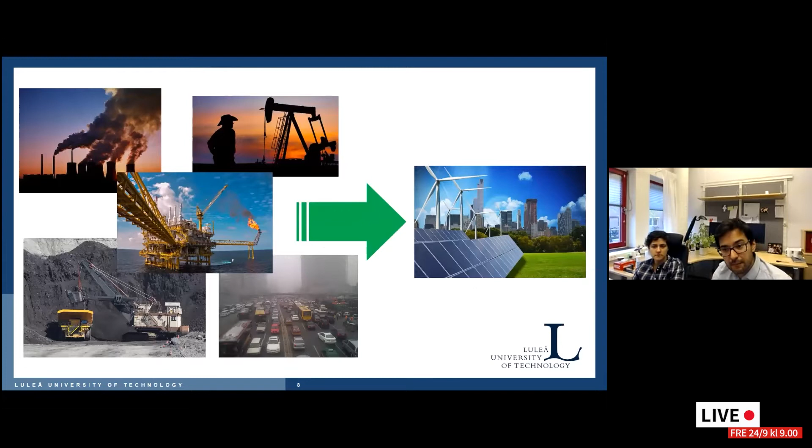So mainly what we see in our group is how to do this transition towards clean energy, but we do that in a big group, including fundamentals of how to produce biofuels, how to store them, how to use biomaterials, for example, to increase efficiency in some kind of process.

But we also need to see the other end, how to communicate this to a national level, to create policies. So we need to use biofuels, but we also need support from government to make this process achieve other levels. And this is what we do here.

And we can go from the fundamental part, as I said. So mainly this part is what we both here are doing. We're looking specific - for myself, I'm doing research involving gasification, that is how to produce a syngas, or synthetic gas. But this is really focusing on fundamental parts.

We have another group here using, for example, energy systems and policies. Another group studying energy efficiency, and another group studying more batteries and CO2 capture and storage area. And the interesting thing about all these groups is that we all are in somehow close contact with the big industries in the field we're working in.

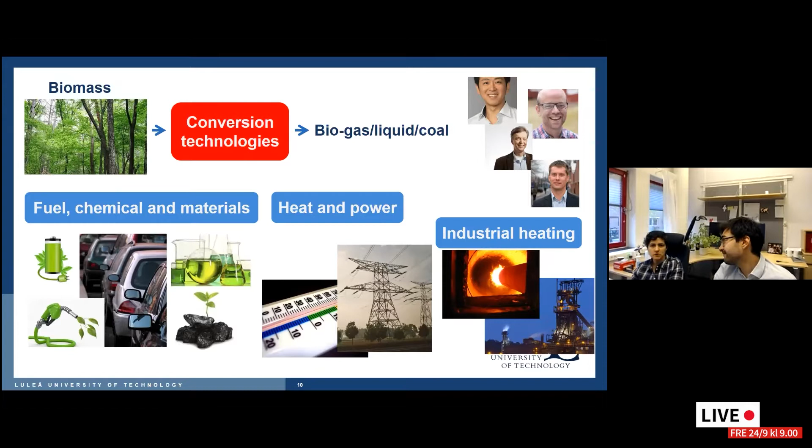Another group we have is energy systems. In the same way that we study how to produce biofuels and introduce them into industries or our lives, we also study how to increase the efficiency of current processes, to save fuel consumption. We also study energy efficiency in buildings, not only in industries.

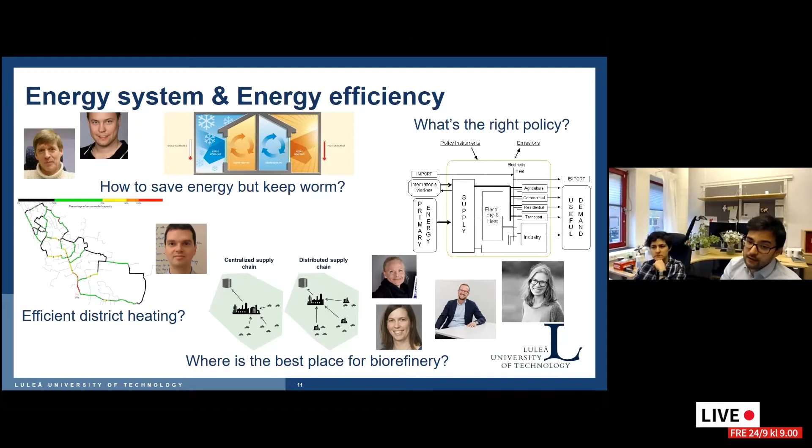Another group studies system analysis, at a national or municipal level. If we introduce, for example, a new biorefinery to produce biofuel for airplanes, what is the best location for that plant, and how do we model what it will affect in other industries or other actors in the energy area? That's what this group does.

Also, in renewable energy, the heart of any system—whether energy comes from solar, wind, or anything else—is the battery and storage, because we need to store energy and use it later or integrate it into the system.

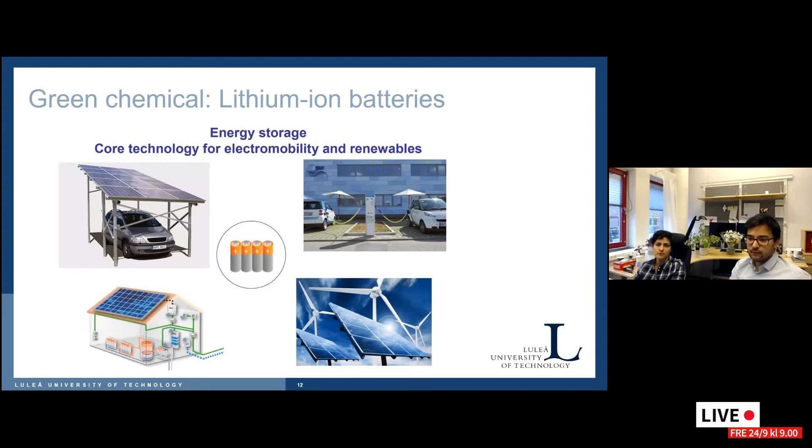For storing now, the most popular option is lithium-ion batteries, which you might know from laptops or mobile phones. But what's really used now are stacks—larger units of lithium-ion batteries.

Now it's really at the edge of science for lithium-ion batteries, because their lifetime and efficiency are really important these days. You can see how chemical engineering and chemistry relate to our division of energy engineering, because the fundamental of the lithium-ion battery is the chemistry happening, and then the electricity you get from that chemical reaction.

We also have a group working specifically on green electrolyte, green anode, and green cathode, so that all the components of the lithium-ion battery are also obtained via green energy.

Now we're going to do a small virtual visit in our lab. Hopefully you can see the video.

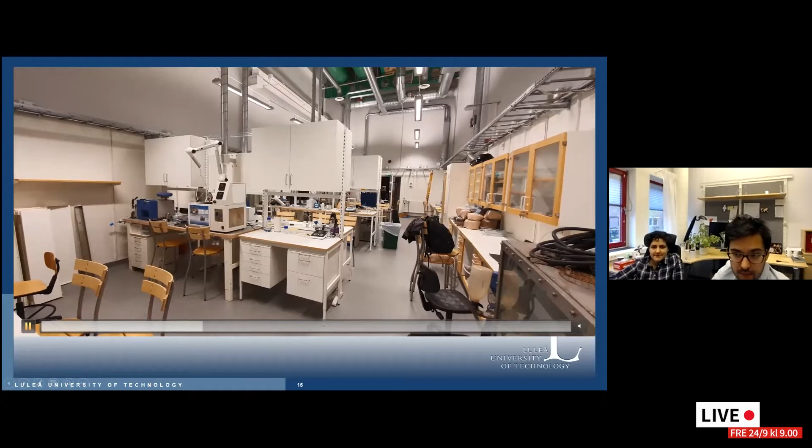This is the first video—this is where we do the chemistry of our research. Here we do fuel characterization, for example. We do some studies in carbon, CO2 capture, ionic liquids, and batteries, as Zahra was saying. Characterization.

This is what we call the clean lab. Now we're going to see... let me try to change.

This one is the big lab, so it's a bit more—I won't say dirty—it's a bit more stuff with big reactors.

Here we have the main four reactors we can see: one is an Auger Reactor for biomass pyrolysis, a drop tube furnace, then a pellet boiler—more like a commercial residential pellet boiler, where we study clean gas and cleaning of flue gases—and then this is a flame reactor, where we can visualize what happens inside a combustion chamber or in a gasification process.

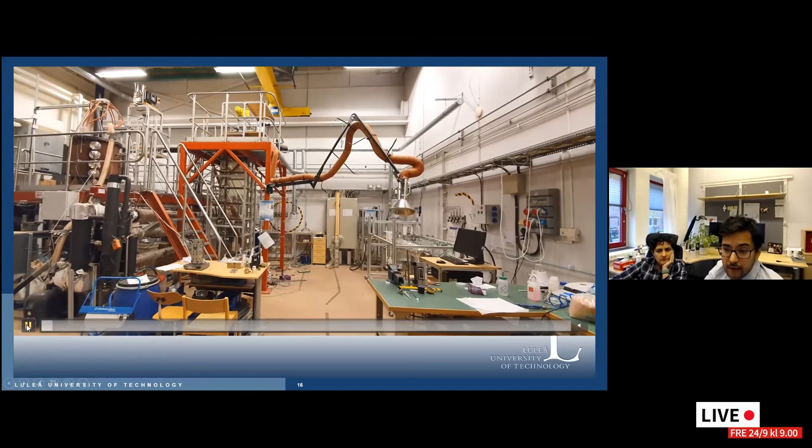If we enter the lab, it's going to look a bit messy, but I don't think we can clean more than this. No, it's very dedicated.

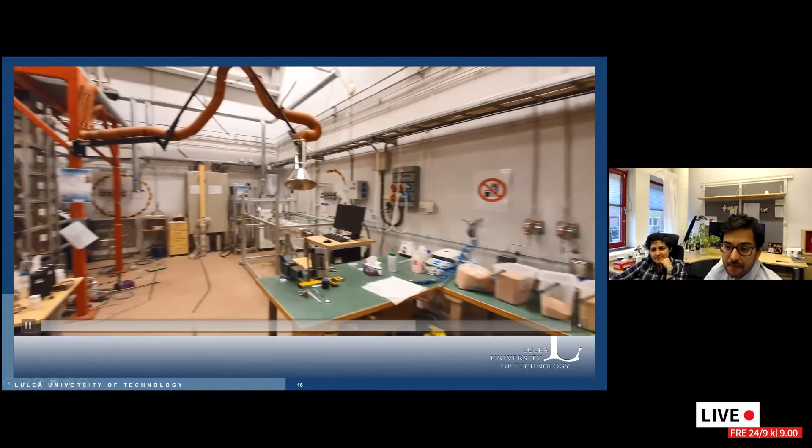So here we have all of our biomass. We can prepare them, characterize them. Then we can go to the first reactor—it's this reactor, for example.

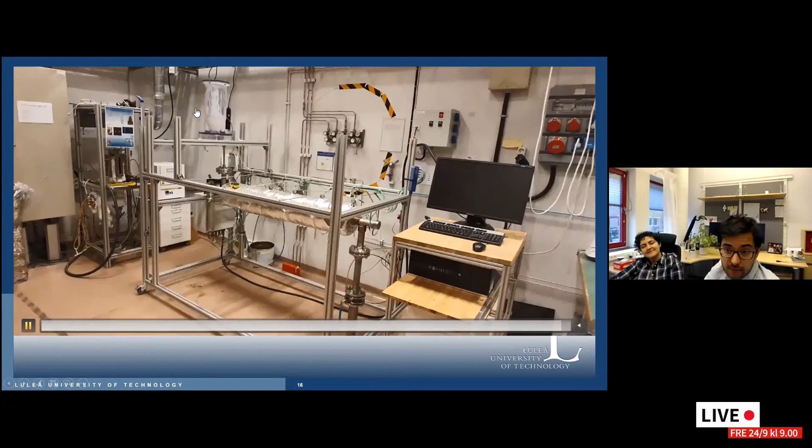We call it the Auger Reactor. Basically we can feed biomass from this hopper here, and this is a screw feeder where we can preheat it, and then we can produce charcoal in different ways using different processes.

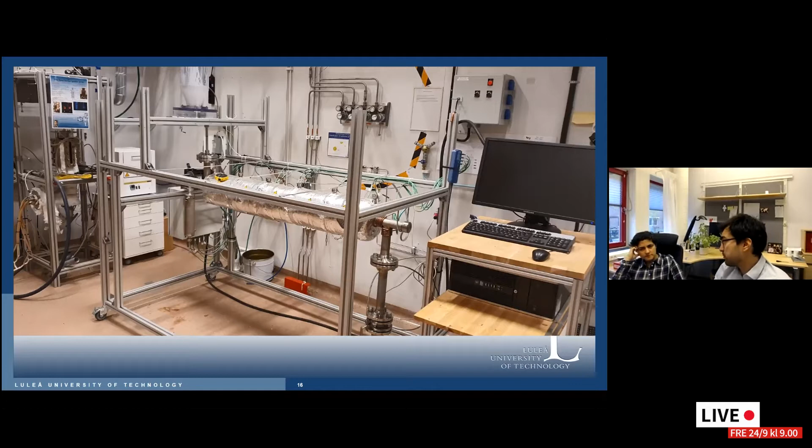So here we basically investigate how to produce charcoal using biomass. This relates to the charcoal you use in your barbecue or for cooking, but we can also do this for substitution in industries—for example, they use a lot of coal for producing iron or for heating industries. We studied a lot how to use, instead of coal—a fossil fuel—charcoal or biochar. We need to produce this biochar with specific characteristics depending on the purpose. I think this is also what Zahra is doing in her research.

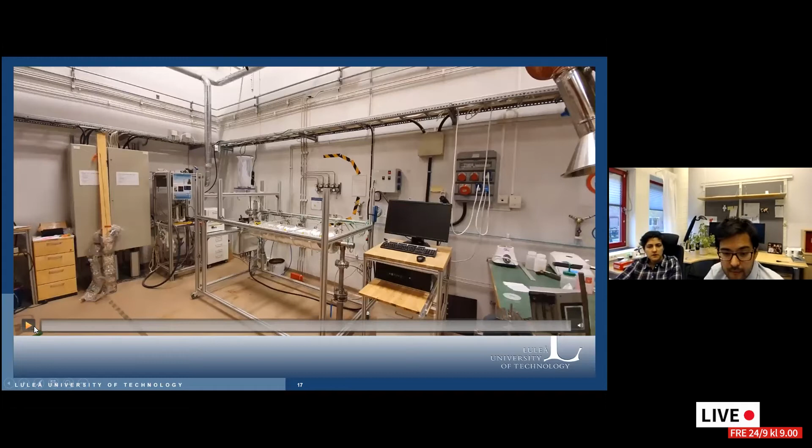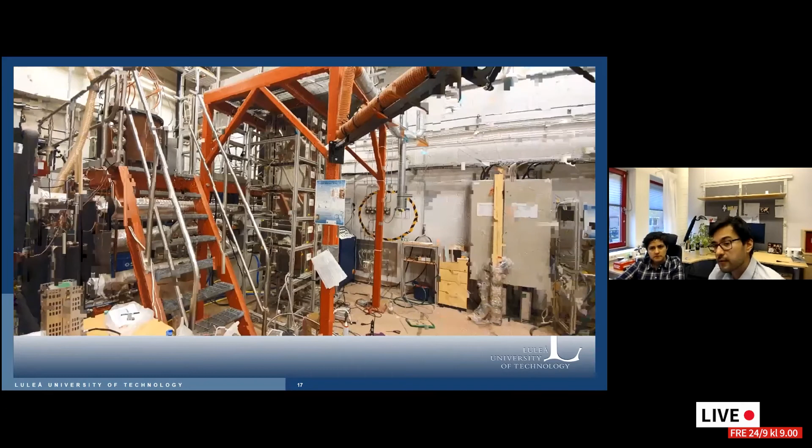Let's try to go to the other part of the lab. This is the drop tube furnace, so we can study how to produce different biochar or even syngas. Now the video is a bit... maybe we can stop the audio, yeah, I will just stop here.

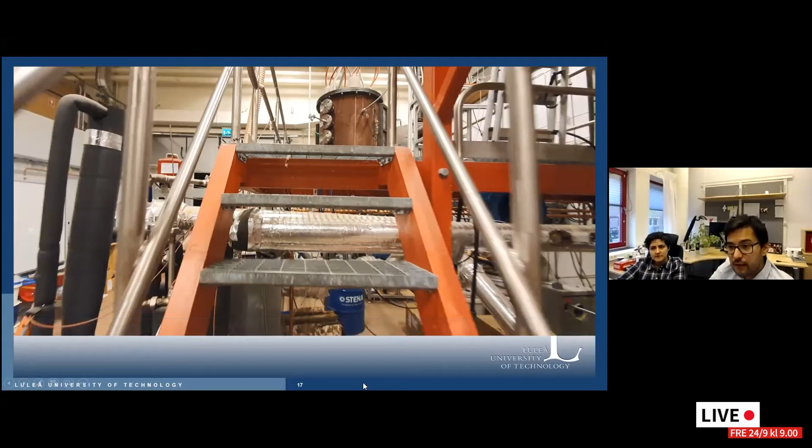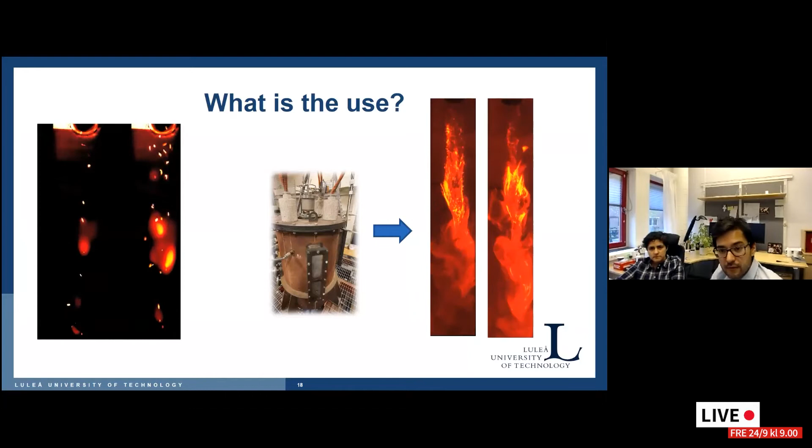What we saw there is this big reactor, we call the Flame Reactor. We inject biomass from the top, for example, and then we can see what happens inside. You have some nice cameras positioned, so we can see the flame, the combustion, or the reacting conditions inside this reactor. This is what I do, trying to produce syngas in a more efficient way. We can also see this with small particles in other conditions, using cameras and optical access reactors.

During these studies, as far as we have experience here, we have a really good atmosphere. It's really friendly, and the PhD students and seniors are really accessible and helpful. Somehow you are really free in choosing your field of interest. Since the future is for energy, you're welcome to join our group. We are here in the corridor if you have any questions or want to talk about any specific topic for your future studies. Welcome to join us.

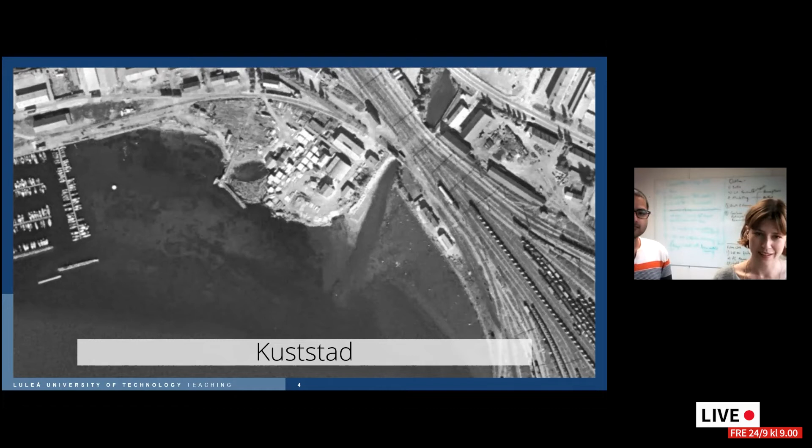This is Kuststad, close to the South Harbor, close to Willys. And this is how it used to look like. And you think, what is this? Well, if you think about it, there are these new beautiful apartment buildings that they built there. And they completely filled this area of sea with soil so they can build these apartment buildings on top of it. So it's a little bit like what they do in Holland and Amsterdam, where they're trying to reclaim land by putting soil there.

So now we would like to show you a little demonstration of what we mean when we talk about how we build with soil and want to improve the soil to take these huge loads of buildings and other structures. So we have to stop sharing our screen momentarily so we can show you two little experiments.

So firstly, I have this bowl here with a suspicious white liquid. This is cornstarch filled with water, and it has very interesting properties because it behaves like a fluid, like you can see it drips. So it doesn't have very good bearing capacity. You can't really build a building on top of that.

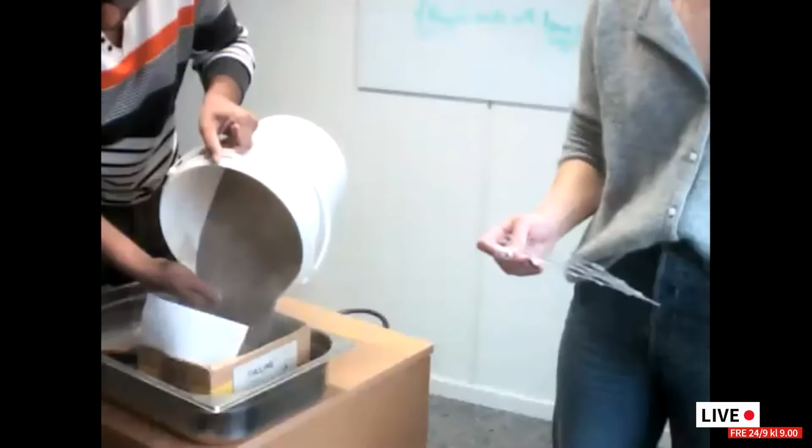Now I will put the final layer on that. So Tarun here is using paper, but in real life we obviously wouldn't use paper. We have things called geogrids that look something like this. They are kind of plastic mesh materials that are quite hard, quite rigid, and these can be used to reinforce soil.

So now you see this box is filled, and now I'm going to open it up from one side. And you see that it stays. So if you can see from that side, that it stays. Now I'm going to put some load and see if it fails or not, because if you put something directly on sand, the slope will fail. But in this case, it stays. So this is basically the function of the reinforcement.

And I can try to put this bucket as well on this and see if it still stays. So in this way, we can actually improve the soil. In real life, we use geogrid or some other things, some nails or rock bolting, or it depends what the structure requires, or some chemical use. So this is one of the illustrations of how you can improve the soil with different things.

So now we're going to go back to our presentation. This was examples of adding things, kind of layers into the soil or on top of soil. But sometimes we can also mix other materials into soil to change its properties.

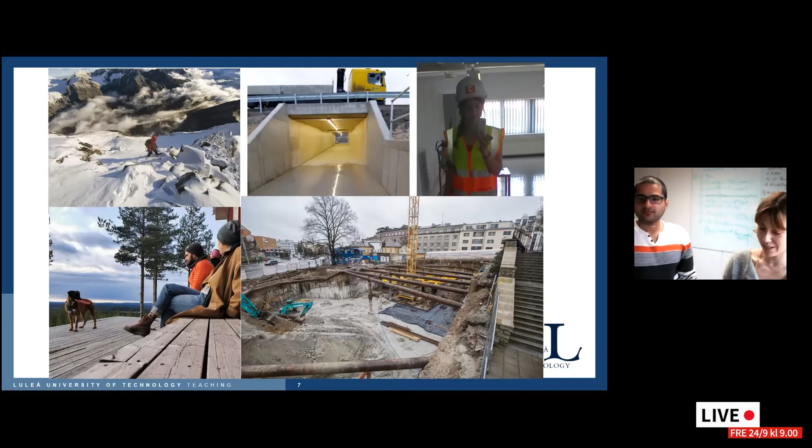Now I let Tarun take over. Thank you, Karina. So now first I will talk about myself, where I'm from. Basically I'm from India, and my hometown is quite in the north, so it's very close to the Himalayas. Then I did my master's studies in geotechnical engineering from one of the oldest civil engineering colleges.

Basically this college was built only for the purpose of design of aqueduct. An aqueduct is basically when a river crosses a canal. That college was opened just so that you can design the aqueduct, and it was opened in 1850. So that's where I did my master's.

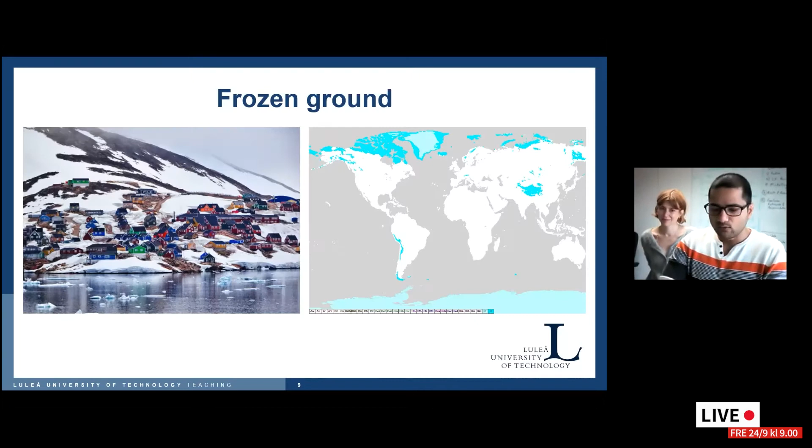So now I will show you guys some video about that. What do you mean by this frozen ground? Let's see what this frozen ground means.

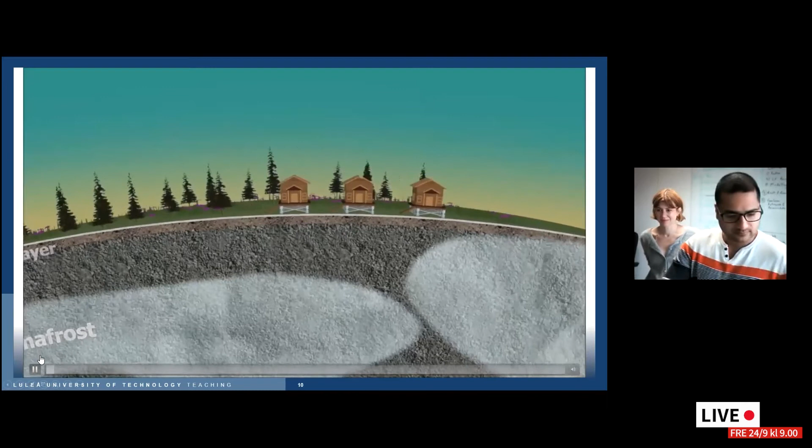Permafrost contains frozen water, which acts like cement, binding loose sediment together. When this ice melts, the ground becomes weak and unstable. Weakened coastlines, compounded by the effects of retreating sea ice, warmer waters, and longer storm seasons, become more vulnerable to erosion.

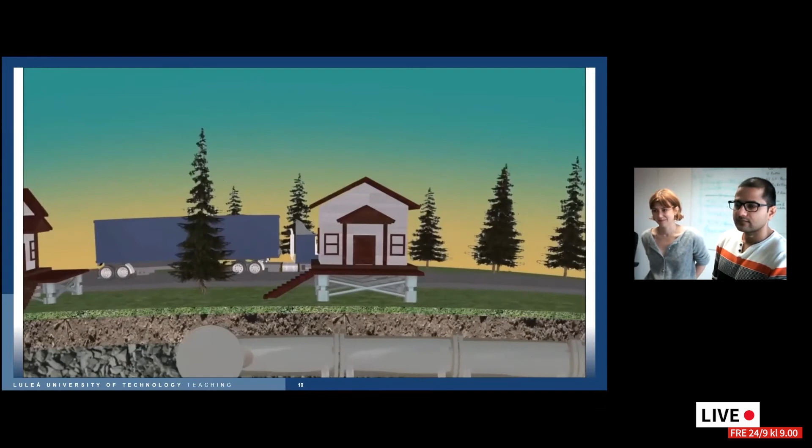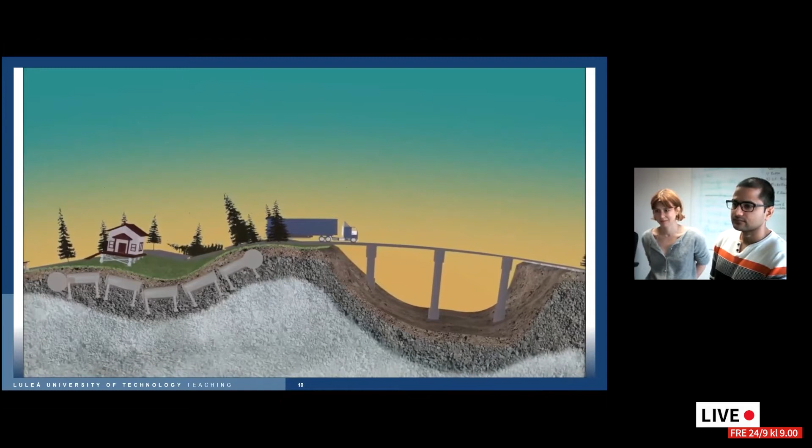In towns and cities built on permafrost, infrastructure was constructed assuming that the solid foundation of permafrost would not change. The loss of this permafrost can result in shifting and settling of the ground, which can damage or even destroy infrastructure. This disrupts everyday services and costs national economies hundreds of millions due to relocations or increasing cost of repairs. In high altitudes and steep mountain terrain, thawing permafrost increases the risk of rockfalls and landslides, which can trigger additional hazards.

So this is about the permafrost. Basically, permafrost means the ground which stays permanently frozen. Now we see that due to climate change, what are the consequences of this melting permafrost?

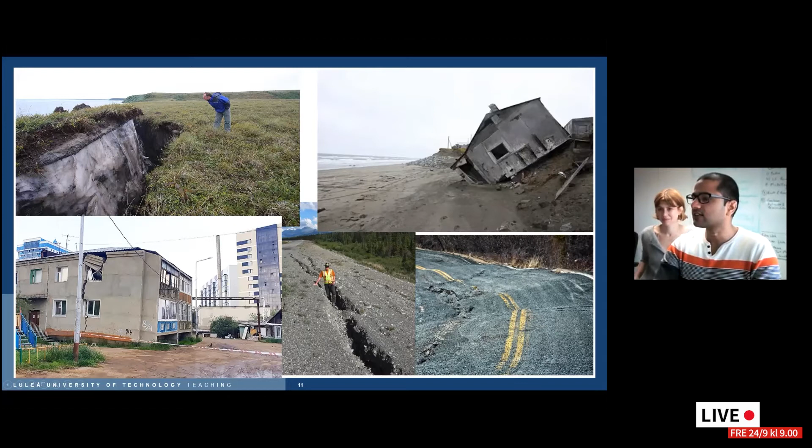So basically, my research is more focused towards these cracks and this unevenness of the ground. I will explain a bit more on this, what my research is about.

If you see these pictures, these are cracks on the pavements, on the roads or cycle roads. They can happen either in the middle of the road or on the side of the road. My main research is to make this road better, make it even, and eliminate these longitudinal cracks. That's why we study this, so that we can do something for this kind of roads and make life smoother for the drivers, pedestrians, and cycle users.

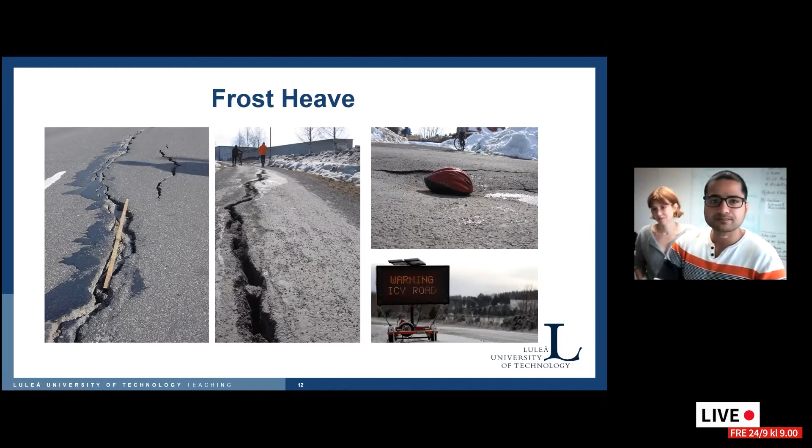Unfortunately, I cannot show you the exact laboratory setup in real practice because then you would have to come to the laboratory and visit our lab so I can properly explain how this setup works. But in real practice, testing the whole soil sample takes around 18 to 20 days, because it requires reaching freezing temperatures and so on.

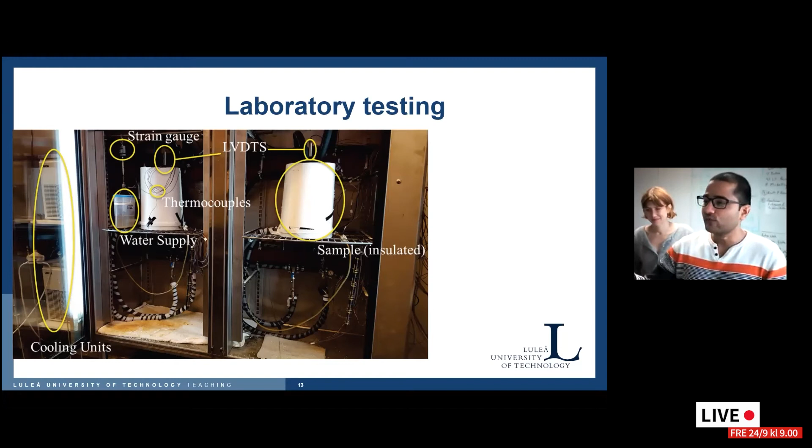Now if you try to see, the ground is now thawed, and now in the middle of this layer, when freezing takes place from the top, these ice lens layers are building. Because of this ice lens layer building in the sample, our whole soil is moving upwards. And this is what happens in real life.

So if you imagine, if you see these cracks on the road, this is what's actually happening in real practice. Under the pavement, when the ground becomes frozen and freezing starts to take place from the top, these ice lenses start to build.

And if you remember from basic high school, ice has 9% more volume than water when water converts into ice. So this is what happens, the ground becomes unstable and gets cracks.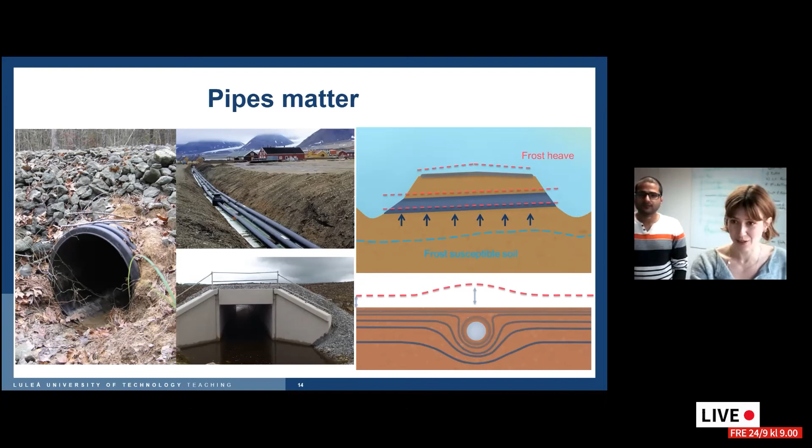So I know we have been quite negative about the effects of frost, but actually there are some positive applications of frost, and sometimes we even want to freeze the soil ourselves. Frozen soil is very stable, as we discussed previously in the video. It said that it's like cement.

If you can imagine, building a tunnel through rock would be quite easy, the rock stands up on its own. What if you want to build a tunnel through sand? I'm sure you can all remember trying to dig a really deep hole on the beach when you were little, and that hole always ended up collapsing. We don't want that to happen to our tunnels when we're building them.

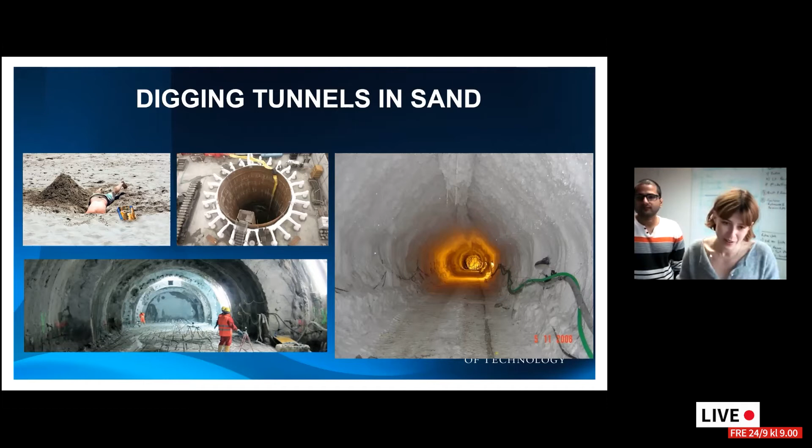But I think the final thought we want you guys to live with is that there is nothing permanent, and that we should expect change. So while we are trying our best, and many other researchers around the world are trying their best to maintain permafrost, we need to learn to adapt to change and try to always improve.

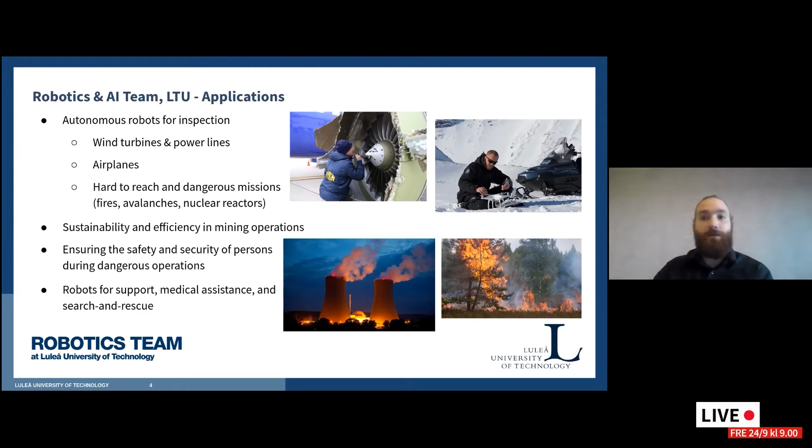Yes, and we're also working with general support robotics and medical assistance, and as I said, search and rescue robotics is a big one. We are trying to also start a lot of collaborations with the fire departments and police departments and such to really push the utilization of robots in search and rescue and dangerous missions.

So for example, you all know that we send large rovers to the moon, to Mars, to different planets. And these robots are great, but they're not very intelligent and they're not very capable of performing complex tasks and complex missions. So we want to develop

artificial intelligence and autonomy solutions that we can embed on these robotic platforms, such that we can perform much more complex tasks, such as autonomous space debris cleanup, and for example, the search for extraterrestrial life in lava tubes on Mars or other underground areas where the robots would be unable to be communicated with from Earth or from any satellite in orbit. So in those missions, it's absolutely crucial to have a completely autonomous robot performing the task.

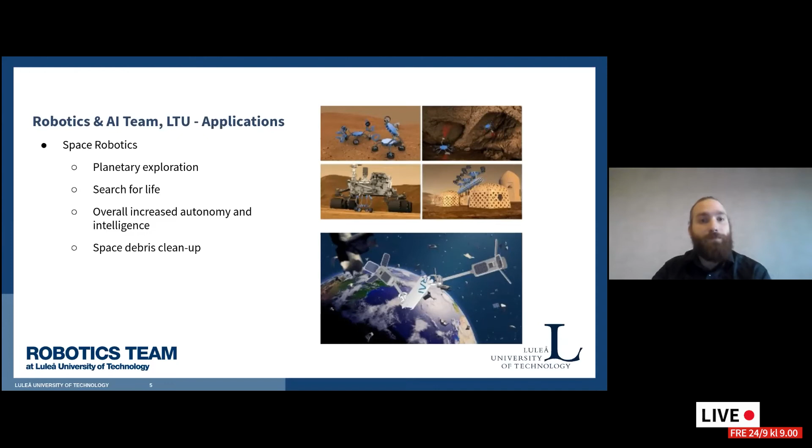Anyway, so I've been talking a lot about artificial intelligence and autonomy. But in my opinion, there's a lot of misunderstanding or simplification of what we mean when we talk about artificial intelligence specifically. A lot of people have this Westworld or general sci-fi notion of AI, where we instantly see this human-like entity capable of talking, trying to mimic human behavior. But that's not really the case in AI - that's just a very small part of it.

What we're working with is the ability for a robot to perceive its environment based on sensors on board the robot, make a decision based on the information it has gathered, and then translate that into actions interacting with the environment to complete its overall complex task - like producing a 3D reconstruction of a completely unknown structure.

So in robotics, a very general workflow you'll see in these autonomy solutions is that a robot carries sensors that produce different perception outputs - this could be a camera stream or a laser scanner and such. Mission planner generally answers the question of what we should do and where we should go. Path planning problems generally deal with how to get there. And then the control layer, which is generally the background we all have in robotics, tries to answer questions of how to move the robot. For example, a walking robot has a very complex control system just to be able to walk.

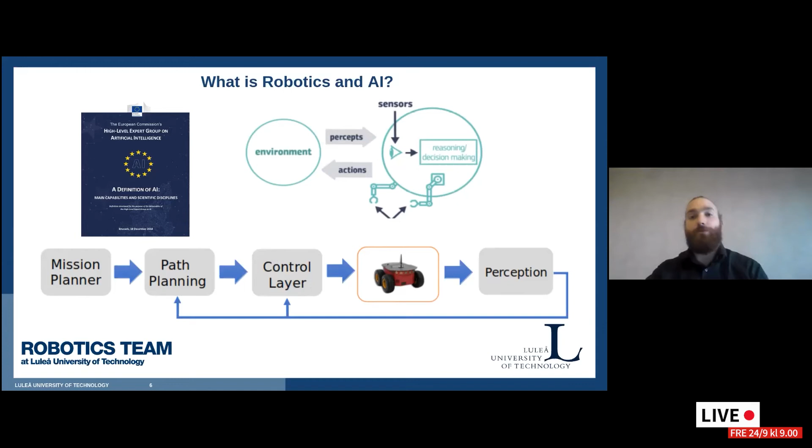Right, so the general idea is that autonomous robots should complete complex tasks while online, using onboard sensors on the robots to interact with their environment to complete the task.

We are also part of the DARPA Subterranean Challenge, or DARPA SubT Challenge, which is the largest robotics competition in the world. We are one of only two European universities attending - DARPA being the research department of the American Defense. This is a very major research competition with a lot of huge universities and industries participating. The general goal is to have multiple autonomous robots moving through vast, very large subterranean structures with a mission to locate objects, produce 3D maps of the environment, and in general move through very complex and dangerous areas.

This is with the overall motivation of being able to advance this sort of autonomy technology in the world, to apply it in real search and rescue operations in, for example, metro stations, mining industries, or caves - in general, areas where if there's been an accident, a fire, or an earthquake, you really do not want to send in humans before you know what the area looks like.

And we were picked up by the Jet Propulsion Laboratory of NASA to be part of their team in this competition. The rest of the team is Caltech and MIT in the US, and then KAIST, which is a South Korean university.

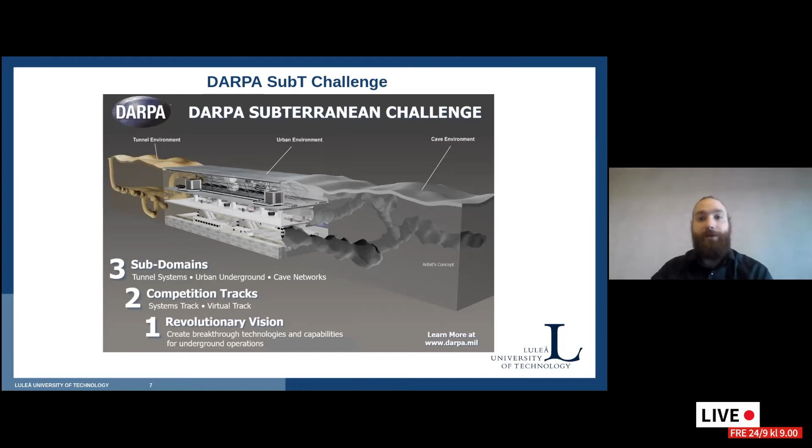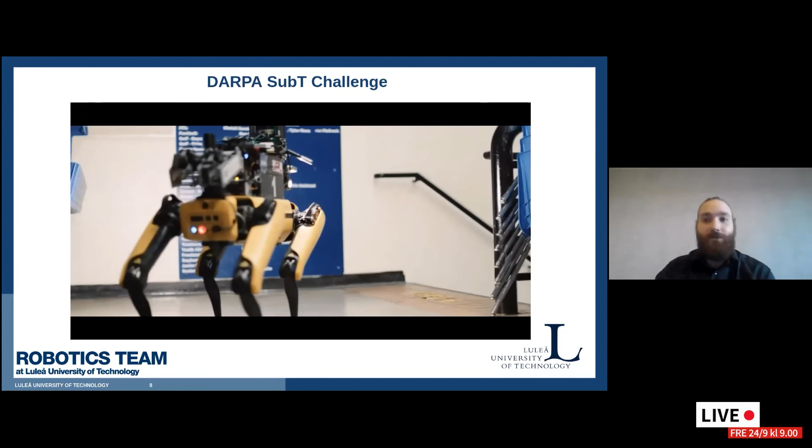I would also like to mention that this competition has been running for around three to four years, and actually today, in a few hours, the final day of competition is starting. So after today or after tomorrow, we will have a winner in this huge competition, with a prize of, I believe, $5 million or something like that.

And here you can see a great example of real autonomy solutions. I think a lot of you recognize this robot dog, called Spot, made by Boston Dynamics. It's seen some viral fame in the last years. But Spot, while it's a mechanical miracle and a great working robot, is not a very smart robot - it's just a very advanced toy. So what we're working with is what you place on top of it.

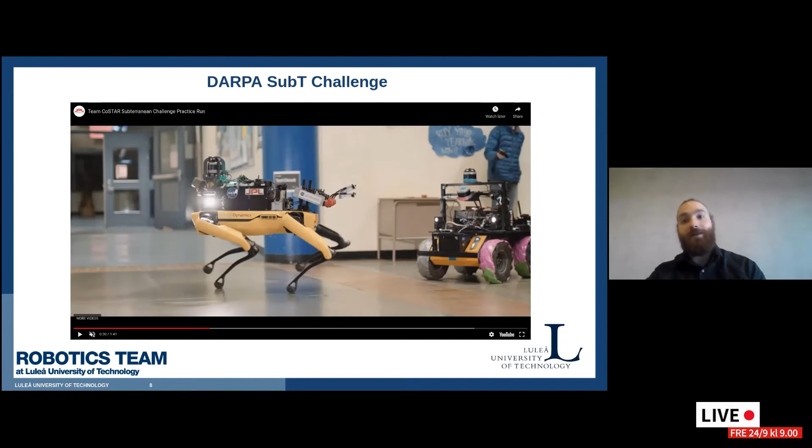This is the set or kit of different kinds of sensors, batteries, and large computational devices or powerful computers that can produce the autonomous behavior we are after. And it is this kit on top that we are actually actively working with - sensors, algorithms that control the robot, and such.

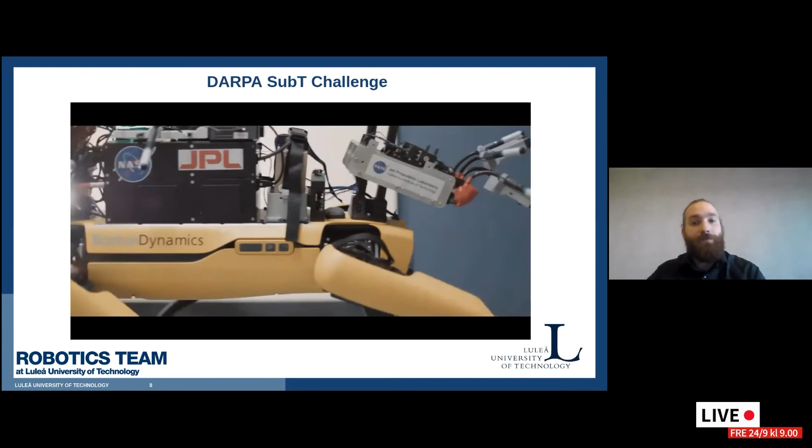So in this case, this is one of the practice runs from the second competition, which our team won. This is at a high school, I believe, but the final round of competition this was from was specifically about exploring an ex-nuclear reactor - a nuclear reactor that wasn't operating anymore.

Yes. Anyway, I think we'll move on.

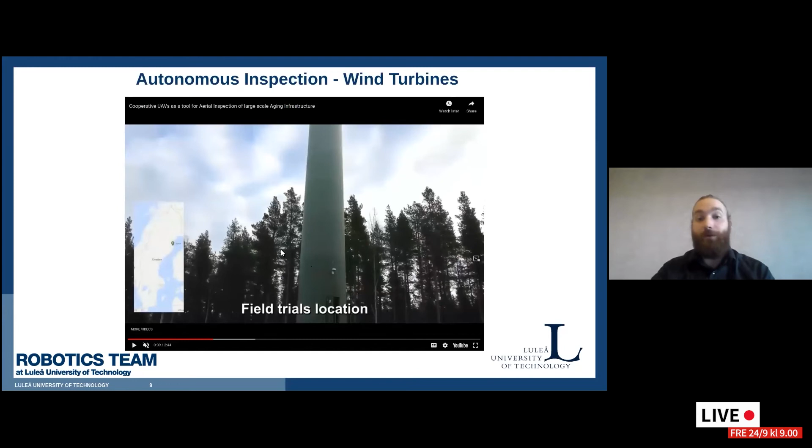Let's move on to some various projects that we have been working on in our team over the last years. This was one of the first major European projects that we worked on, before my time here at the Robotics and AI team.

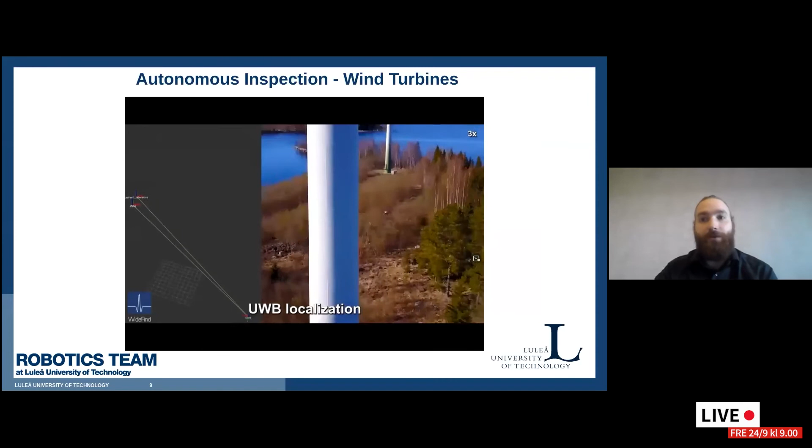This project was about aerial inspection of large infrastructure, in particular wind turbines. Now these wind turbines are absolutely massive, something around 120 meters at the top blade.

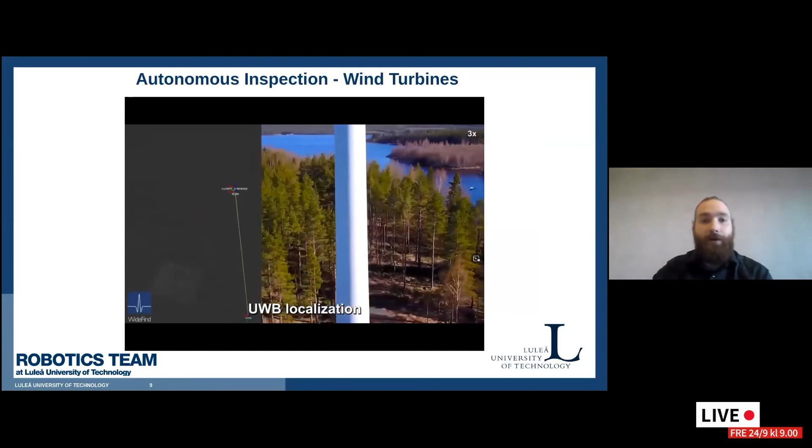The only way to actually perform this sort of inspection right now, especially on the blades, is to take them down and put them on the ground, because there's no safe way for a human to get up there and perform inspection.

So what we developed was autonomous solutions that allowed multiple drones, in this case you will soon see two, to collaboratively perform a visual inspection of the whole infrastructure. I believe this was the first ever large-scale multi-UAV inspection of infrastructure.

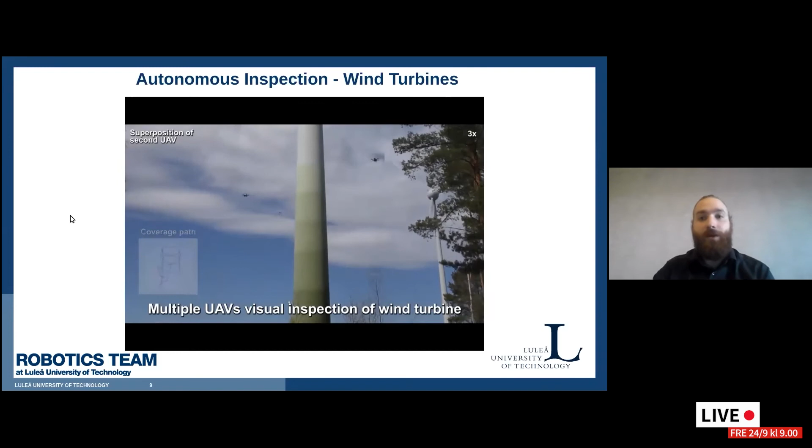Here you can see, I think this is still overlaying one of the UAVs, but we are producing inspection paths that the UAVs are tasked to follow, such that they inspect the whole infrastructure. A great thing about doing autonomous solutions instead of having an operator or a pilot drive these drones...

This 3D reconstruction is not very dense that you can see here, but that was not really the point. We were talking about close-up inspection of damages, so it's not really visible.

But the great thing about autonomous solutions is that they're very repeatable. You could send the exact same two drones three months later, and they would follow the exact same inspection path, and you would get the exact same output.

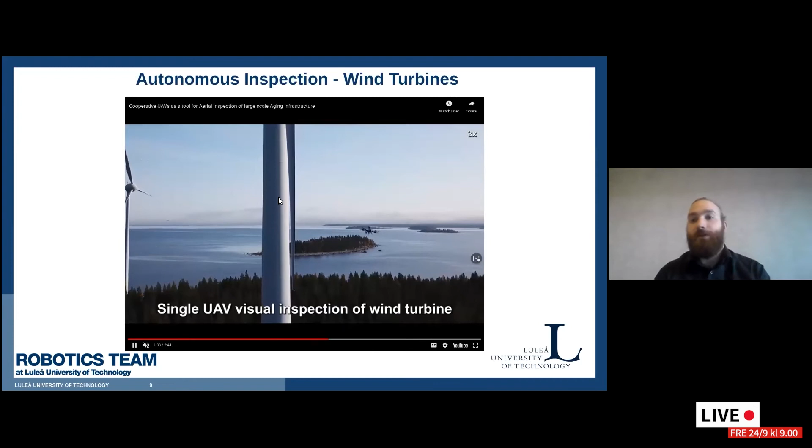Moving from the very large outdoor infrastructure down into the mining environment, one of the major things we've been working on in the last years has been inspection and 3D reconstruction of subterranean environments and mining environments, in particular mining tunnels.

And of course, give me a second, do a little update. Let's see if he wants to play. Spoilers, we have a spot. All right, here we go.

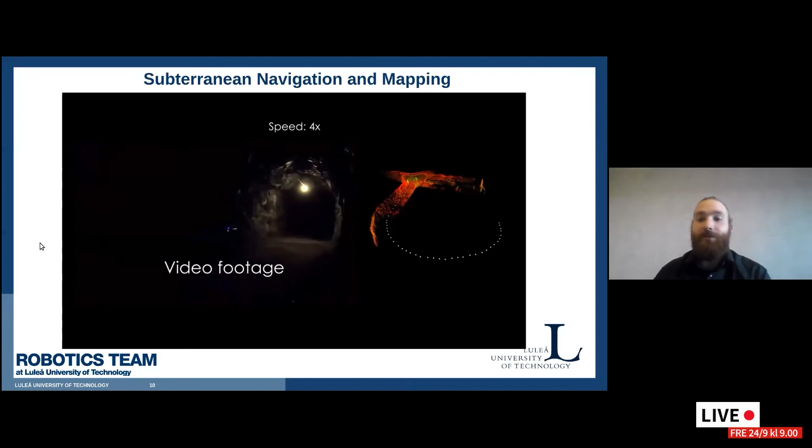In this case, we're talking about a completely autonomous drone that we send into these sort of tunnel environments. Based on the onboard sensors, we can produce this sort of very dense, very good 3D reconstructions. And these are not just visually looking like this.

You could actually load these into a virtual world or a virtual environment, and you can walk through them. So every single point that you see in this image has an XYZ coordinate to it.

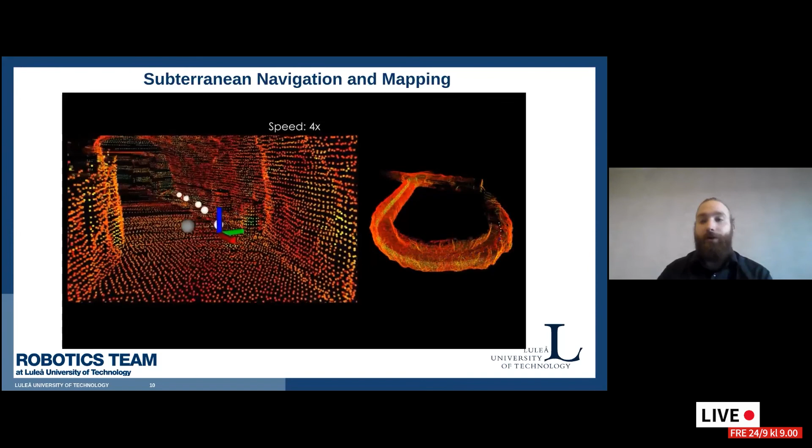You can see to the right that the robot is actually building a map of its environment while it's moving through it. This is not based on any kind of post-processing. This is happening online, only using onboard computation of the robot while it's exploring.

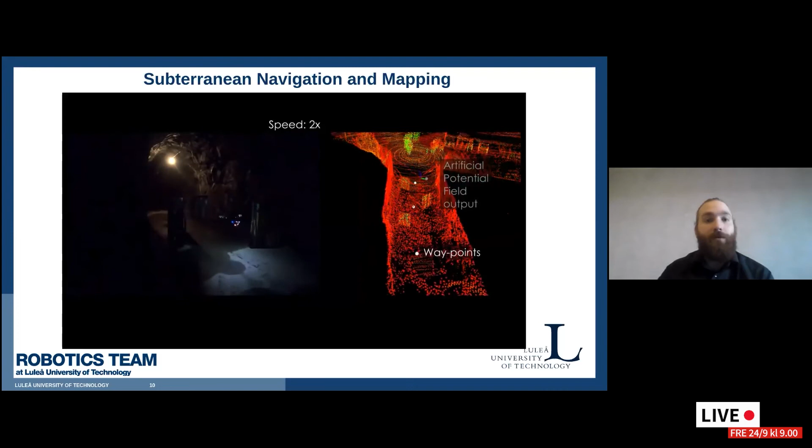Another example of a very important concept in robotics is collision avoidance. Here you can see just a short video of our autonomous drone avoiding some obstacles in the mining environment.

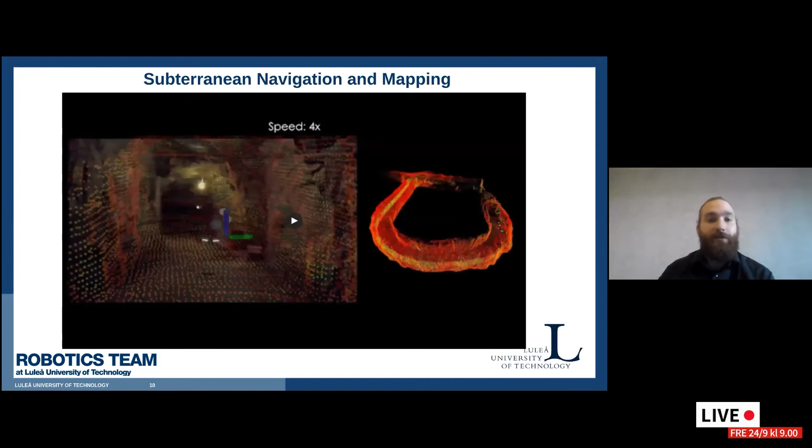We've also made it the carrier for an autonomous drone platform, meaning that one of the largest constraints with using autonomous drones for these sort of missions is that you have to carry so much payload in terms of large sensors and computers that you have very, very limited flight time.

The constraining part about legged robots or even wheeled ground robots is that whenever there's vertical displacement of the terrain, like a drop or a cliff, or rubble on the ground, or a very tight passage, they are completely unable to go into those areas. So what we're working very intensely on is multimodality solutions where we send in the legged robot, it carries the drone, and whenever it detects an area it can no longer go, we send in the drone to perform the detailed inspection.

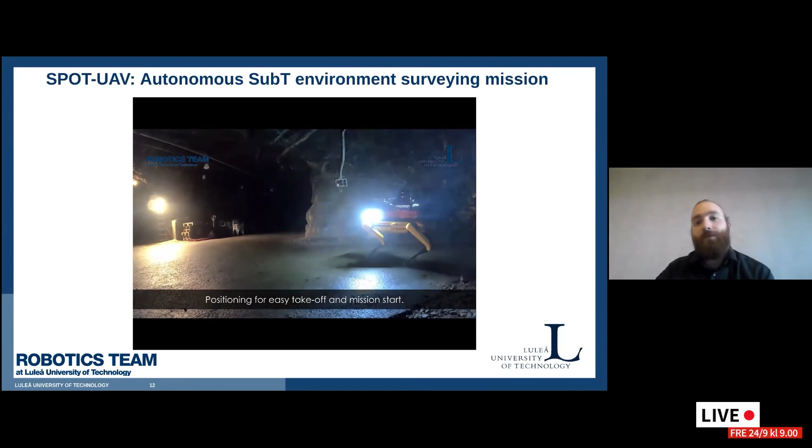This mission, I would say, is a pure textbook search and rescue mission. Go into the dangerous subterranean area and then launch the drone into the tunnel, where it will try to detect a set of objects like a survivor and a backpack. This would be something a search and rescue or first responder team would send in to get a general view of the area, where the output would be the full 3D reconstruction of the environment, as well as the location of any objects of interest within it.

So you can see the drone performing its inspection mission. Here you can see a hard hat down to the bottom left, and we get a detection hit based on neural network algorithms we trained to detect these kinds of objects using the onboard camera. There's a backpack on the top left and some rope on the bottom right that we're also detecting. And then most importantly, the survivor here, the doll that we hid behind a wheelbarrow. Our algorithms are still able to detect that there was a human in this area.

Soon you'll see the most important part about this mission structure. You can see that we're actually locating these objects in the environment. So if this was a real search and rescue mission, the first responders who would have to go into this area to save the survivor would know exactly how the environment looks after the disaster, and also the exact locations in that map of any survivors or objects of interest.

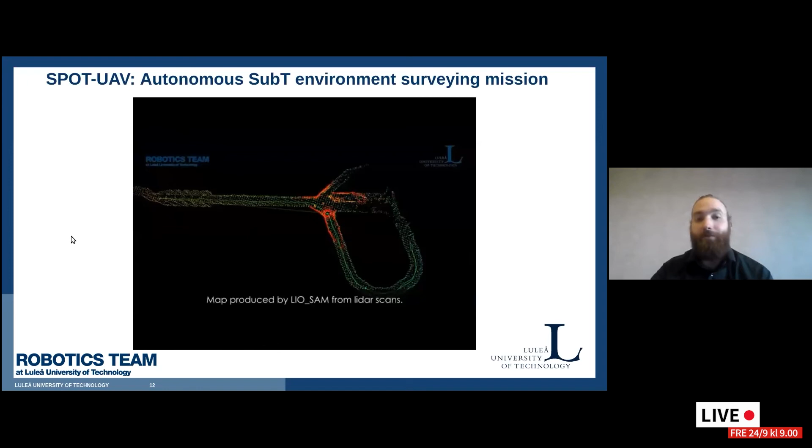So this was our general contribution to the subterranean challenge environment: the ability to send in the legged robots to a deployment point, and then the drone would go in and detect various objects of interest. You can see this is a rather accurate but not very dense map of the environment, but it shows the general structure.

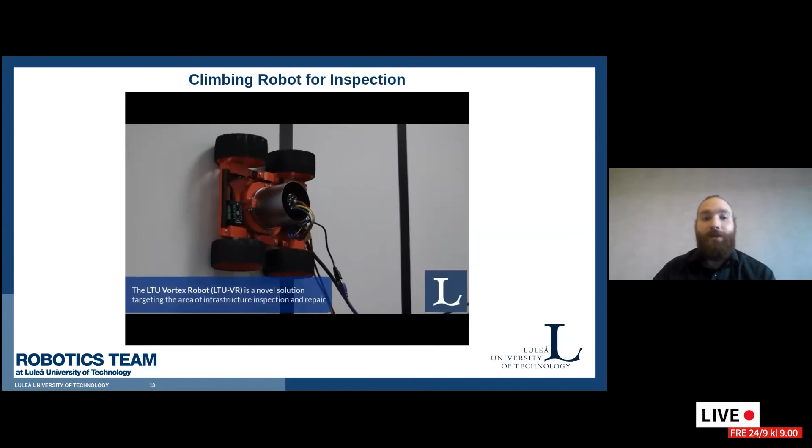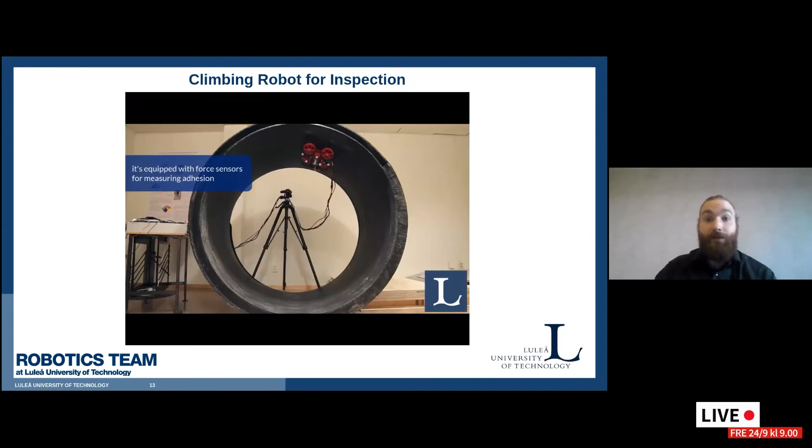Moving on a bit, we're not actually only working with drones or UAVs, unmanned aerial vehicles. We also have a lot of other robots that we're working with. This is a Vortex robot prototype, a climbing robot designed for inspection of, for example, different kinds of composite material surfaces like airplanes. This is one of the few climbing robots in the world that can actually climb outside of magnetic surfaces. Generally you solve this sort of climbing problem by magnetizing the wheels, but our platform can move from surface to surface, go in any direction, and go over from one material to the next. Here you can see it almost looks faked, in my opinion, when you're seeing it in the real environment performing its task.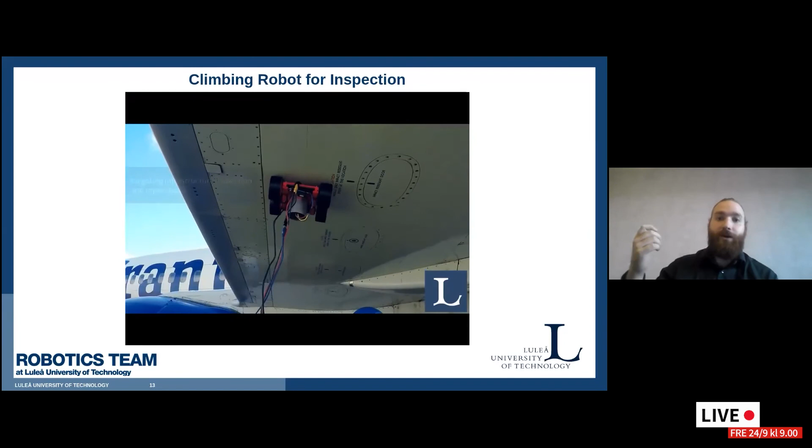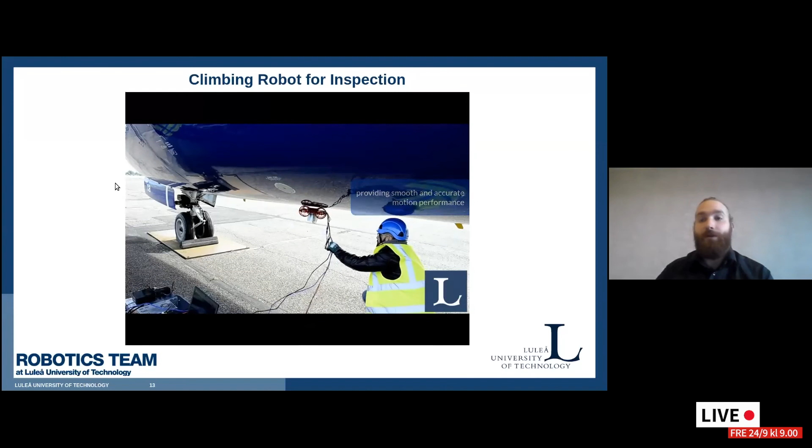This was in collaboration with another university, where our task was to design the robot itself and do the mathematics and modeling to enable this huge electric fan to perform the suction force that keeps the robot stable on the surface, while the other university's task was to develop the sensors that could detect, for example, micro cracks in this airplane composite material.

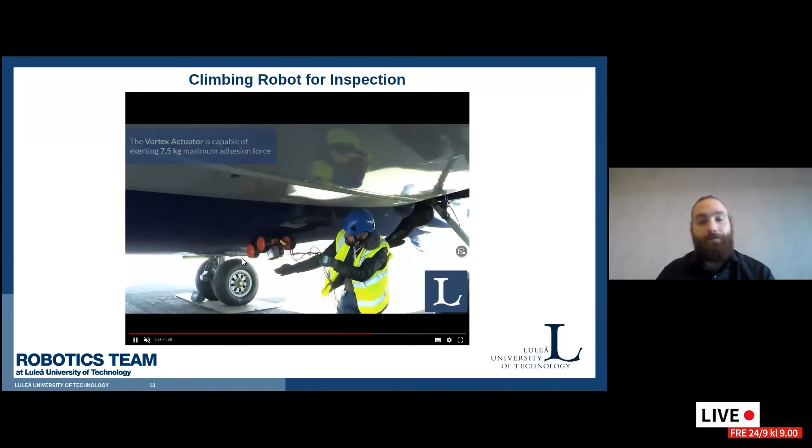And the idea would be to launch multiple of those to perform airplane inspection considerably much quicker than it can be done by humans today.

I would like to wrap up this presentation by being a bit selfish and showing you some of the research I'm working on, research I've had the pleasure to directly work on as my own personal project in the last couple of years.

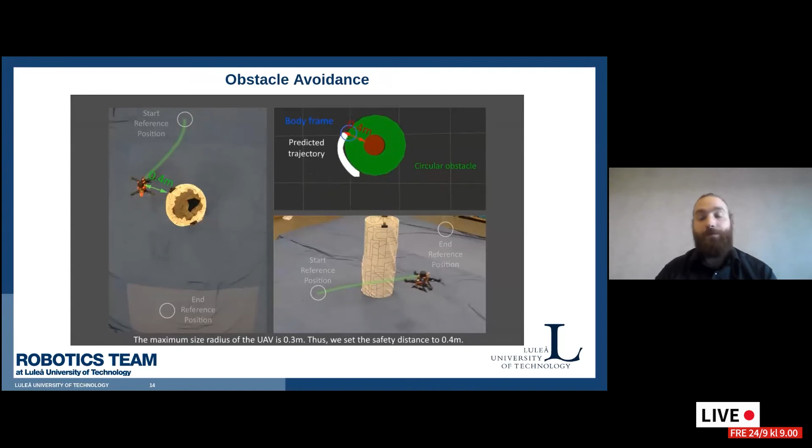While I was part of the full missions, I am generally working specifically on navigation and obstacle avoidance. This is some algorithms we developed. To the top right, you can see how the drone perceives the world, based on 2D LiDAR scans, and it classifies the environment into different types of obstacles.

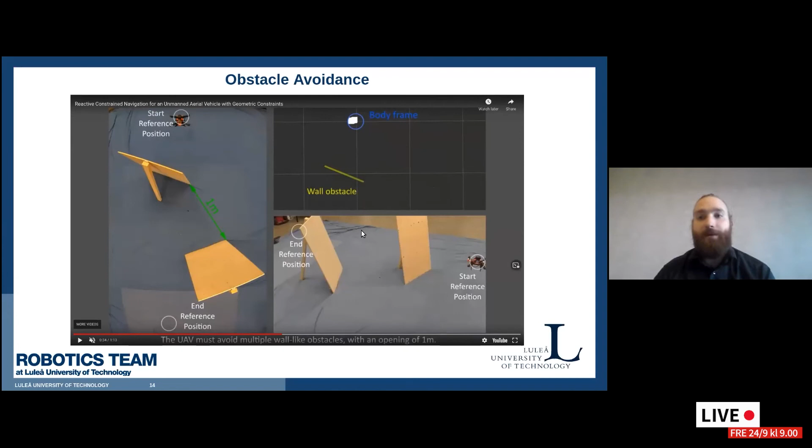We have a collision avoidance or navigation algorithm that plans its path a few seconds into the future, generally trying to avoid these kinds of obstacles. This white snaking line is how the robot predicts it will move in the future, and as you can see, it very smoothly avoids any obstacles in the environment and makes its way through.

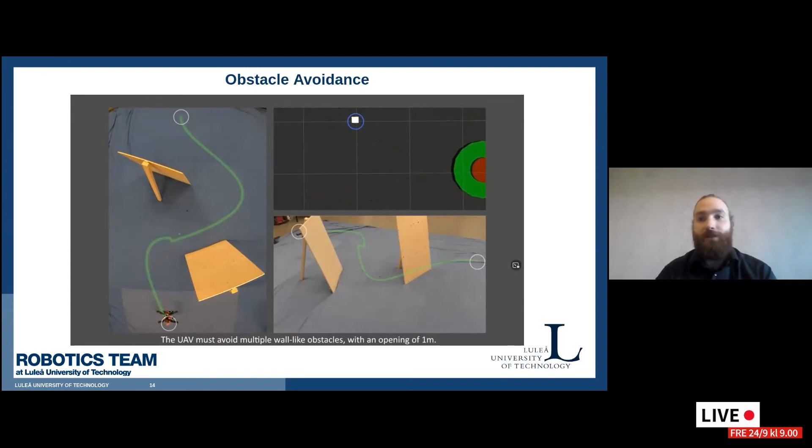One of the main benefits of this algorithm is the ability to move through very tight openings. Here we said the drone is not allowed to go more or less than 0.4 meters from any obstacle. We made a small opening of 0.85 meters, so there's only a 5 centimeter margin from the drone's perspective in this case.

These slides, what are you gonna do?

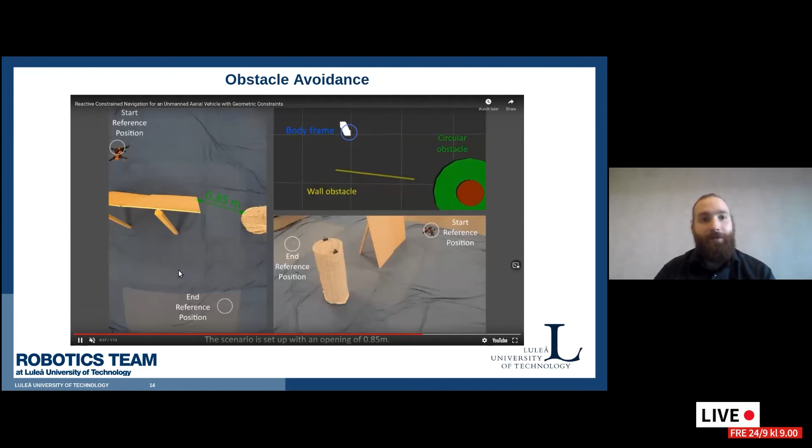Here we go. Still based on our autonomy solutions, and with a very sharp turn, the robot manages to pass through without hitting the propellers into any part of the environment.

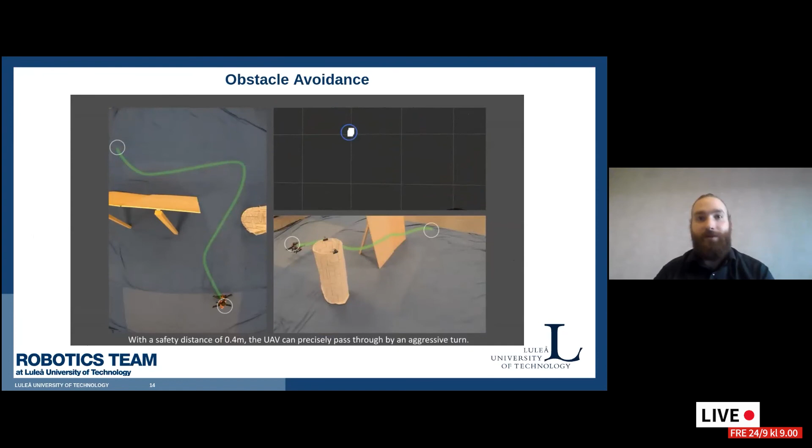We also apply this sort of collision avoidance scheme — let's skip the math part.

We also apply this collision avoidance solution to multi-agent systems. In this case, the demonstration is about small drones avoiding each other inside our lab. Here they are sharing all the information about where they are planning to go, and using this shared information to detect if there are any possible collisions in the path. If there are, those two robots couple with each other and decide which paths they can take that satisfy both their demands, so to speak, while still not colliding with each other.

Again, to the bottom right, you see how the drone would see the world in this case. Here's a more challenging scenario: we have 10 drones as 2 teams of 5. We task the 2 teams to swap positions, and they should all maintain a specified safety distance from each other. You can see here in slow motion how this obstacle detection based on shared data is happening.

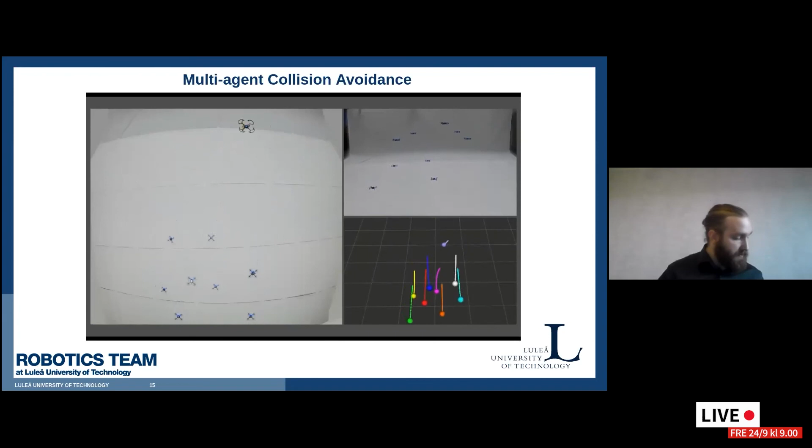Finally, last experiment here: we also introduce a manually controlled UAV where we have absolutely no idea how it's planning to move. This is just a normal drone controlled by a radio controller, and we're trying to fly it into the drones that are holding a very tight formation. As you can see, they always choose avoidance paths that don't disrupt the other drones, and also avoid the manually controlled UAV at the same time.

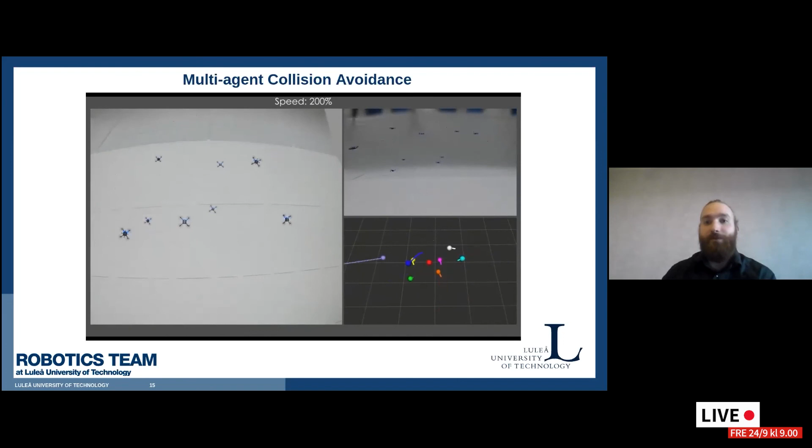So we would call this a distributed solution, where each agent is doing its own thing, but they share information with each other.

Below zero. Above the clouds. Below the ground. From earth to raw materials. Through fire to construction. To sustainable living. From climate change to changing our way of life. From ideas to humanities to business. From Luleå University of Technology to the world. To the Arctic. Into the future. Into the unknown.

I always get goosebumps when I watch that video. So inspiring. So here at Luleå University of Technology, we have 100 different programs.

Some of the areas you can study are business and finance, nursing and health sciences, acting and different music programs including jazz and orchestral, teacher education, media and industrial design, and of course our engineering programs, with exciting programs like space technology and one of our newest programs, applied artificial intelligence, which goes hand in hand with what Björn is working on.

Here we have a few pictures of what it's like in and around campus. Besides studying, there's all kinds of activities available. We have all kinds of different associations, societies, and clubs that you can join. There's clubs in almost anything you can think of.

For example, sports like canoeing, hockey, innebandy, rock climbing, you name it, we have it. And if there isn't anything that's interesting to you, you can always make your own club. Because it's such a welcoming campus, there's always somebody who can join in with your club.